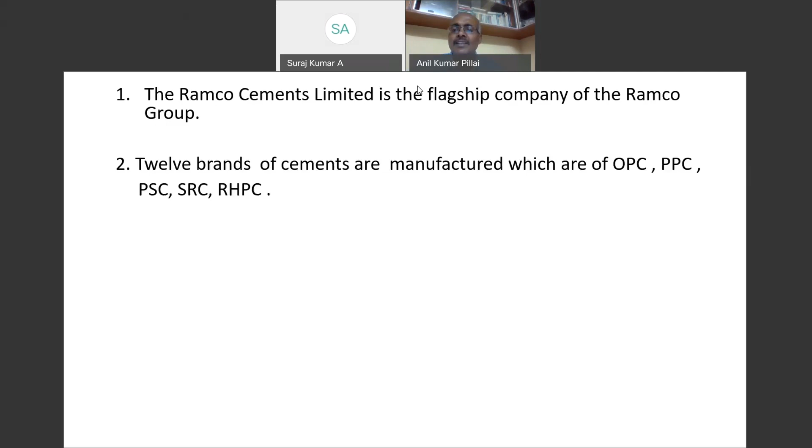What we do is our team of civil engineers goes to the site to understand the requirements of concrete, because we need to understand what exactly the quality of concrete required at site is. That is where most of us go wrong, because at some places, mostly in small project sites, we do not define the properties of concrete. Once we define the properties of concrete, it's easier for us to see what should be the constituent materials and how the mix design should be, because it all starts with the basic definition.

As far as Ramco Cement is concerned, we are manufacturing from eight state-of-the-art production facilities that include integrated cement plants and grinding units. Presently, with a production capacity of 16.5 million tons, it is expected to reach 20 million tons per annum, because we have our new grinding unit at Odisha, our grinding units at Kolagat and Vizag have also been expanded, and we have a new integrated plant coming at Kurnool in Andhra Pradesh. So that is expected to take it to 20 million tons per annum.

We are also into the field of ready mix concrete and dry mortar products, and we operate one of the largest wind farms in the country. Because ready mix concrete, as all of us know, we have a unit at Chennai, and we are able to see how concrete is being produced using our cement.

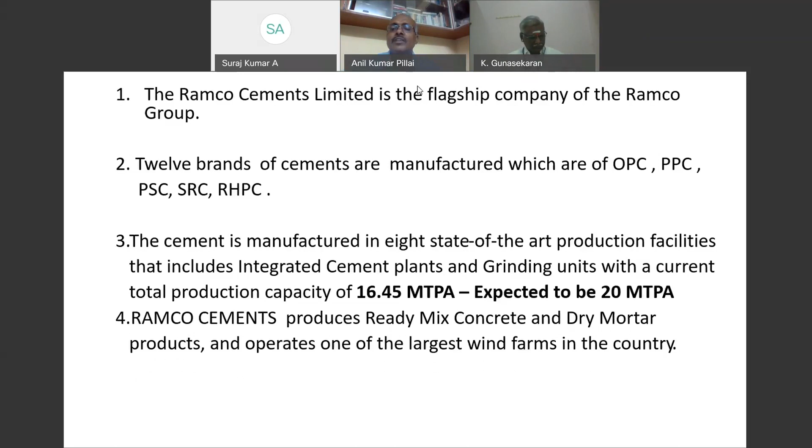Dry mortar products are used basically for non-structural applications, and the dry mortar plant at Chennai is established in collaboration with M-Tec Germany. That is where we are able to manufacture various kinds of products, like tile adhesive, super fine putty, and various kinds of tile grouts. So all these plastering compounds, related to non-structural applications, come from our dry mortar plant.

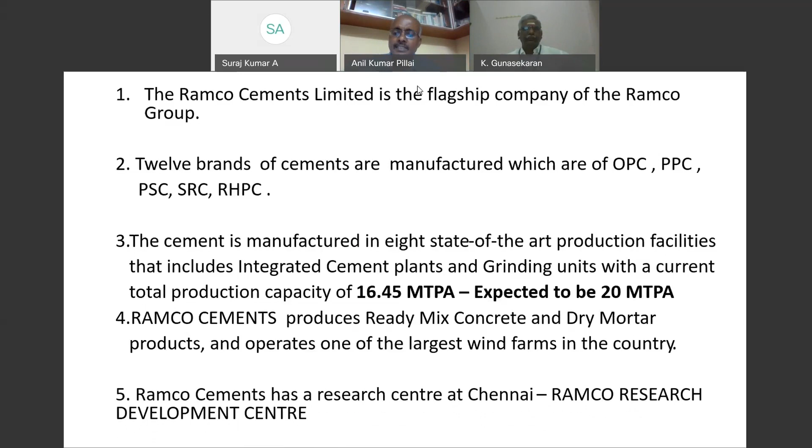We also have a research center at Chennai, the Ramco Research Development Center. This is a place where we do a lot of work on concrete as well as cement, because it is not only cement that is important, but what is the behavior of concrete when we use those particular types of cement, that is very important.

What we do is we get the requirements of concrete from various customers. We have done a lot of concrete mix designs, so by virtue of that, we have a database of concrete mix designs at our Ramco Research Development Center.

As all of us know, there are a number of variables, because the type of aggregates, the type of sand, the type of chemical admixtures available throughout the place, wherever we see, would be different. The chemical admixtures would be manufactured by different companies. So we have a concrete mix which is a judicious combination of all these ingredients, so that the objectives of the concrete are fulfilled.

That is where one of the basic challenges we see is cement chemical admixture compatibility, and that is where we have been able to help our customers, because cement admixture compatibility is sometimes very puzzling, sometimes very tricky, and the easiest way is to do a trial set of concrete mix using those proportions, and that is where we have been able to help.

Okay, at my place, he's joined, huh? Yeah, sir, are you there? Sir, I am joined, yes sir, I am here. I am joined already. Okay, fine.

Before I start, I will take a few minutes to give a brief outline of my presentation. First of all, the topic of concrete properties has no boundary limit to restrict it, so we can go on talking and discussing in different domains and angles on concrete properties, starting from what is concrete, properties of concrete in fresh and hardened condition. When we say hardened concrete condition, concrete properties under different domains like mechanical properties, durability properties, bond properties, structural properties, both structural and non-structural element properties also.

All this can be discussed in different ways for different levels of people like students, faculty members, research scholars, and practicing people. But today the forum is different because all levels of people are here as the audience. Therefore, with the time availability, I will try my best to discuss some important concrete properties in such a way to attract the different levels of the audience.

So this is my usual way of starting. Normally my session is always interactive, but since today's forum is different, the question also will be asked by me, and the answer also will be given from my side itself. So normally, whenever I am talking about concrete, this is the first question I use to ask the audience: which is the most widely used substance on the earth?

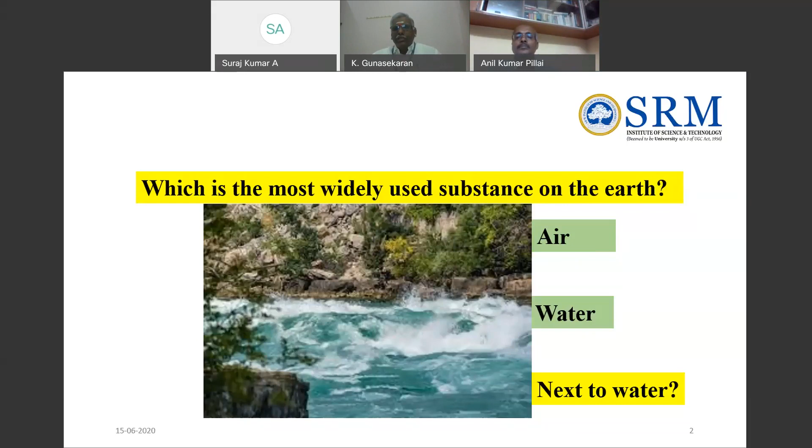Then what is the next one? Next to water, there is no doubt, it is nothing but concrete, the construction material. Concrete is the very compatible material from a construction point of view.

Many reasons are there. One is that the main ingredients to produce concrete are readily and cheaply available: cement, sand, aggregate, water. These are the main normal ingredients. Except cement, all others are natural resource materials available everywhere. Nowadays cement is also available all over the world, even in remote villages. So the ingredients are very cheap and readily available everywhere, so no need to worry about where to get them.

The second reason is that it is possible to make any kind of pattern or shape. It is not necessary to only go for a symmetrical or regular section. Whatever shape you want to create, you just need the mold for that pattern. If you prepare the mold, prepare the concrete, fill it, and after it sets, remove it, you'll get the pattern. That is another factor.

The next one is energy. How much energy do you have to put in to produce concrete? Very, very little. If you decide now, within half an hour you can collect all the ingredients, take some proportion, mix the concrete, mix the ingredients, and get the concrete. That is possible, whether you are producing bad concrete or good concrete is a different matter, but concrete is concrete. No other material can be produced on your own without much energy.

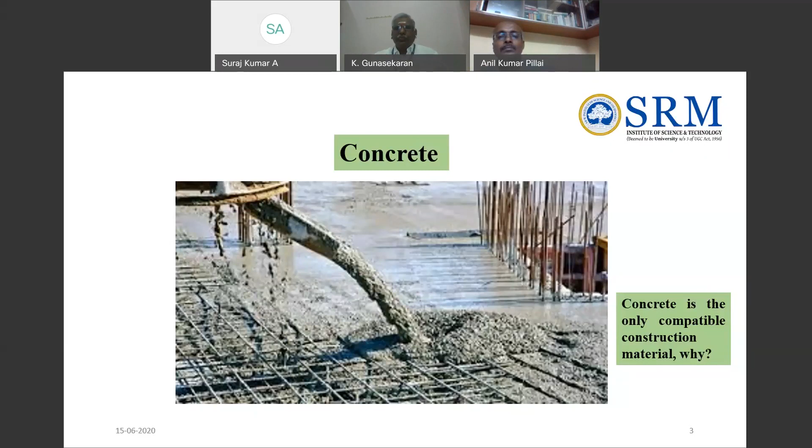So what is concrete? To understand this, I like to use the example of the South Indian favorite breakfast, idli and dosa. This idli and dosa need certain ingredients, and that too in some proportion. If you do not follow the proportion, if you do not follow the quality of ingredients, then your idli and dosa will not turn out as idli and dosa, it will become something else.

Likewise, concrete also has ingredients that should be of good quality. At the same time, it should have good proportions for the requirement of the specific purpose of the work, because concrete produced for one particular purpose cannot be used for some other purpose or some other site. Different purposes, different projects, different locations need different proportions and different quality of materials. So whatever material you use should be of quality as per the standard, and there should be proper proportioning, otherwise it will go wrong.

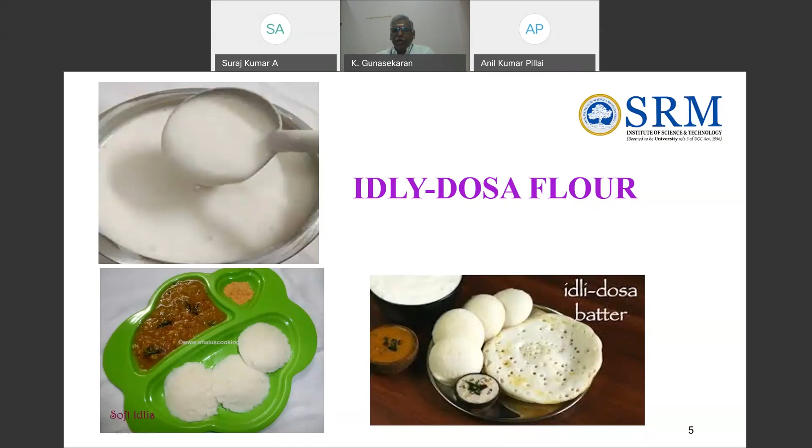So comparing to idli and dosa, concrete is very similar to that. For example, the ingredients used for idli and dosa are rice, urad dal, fenugreek seed, salt and water. All these materials are there as ingredients for the preparation of idli and dosa, but the quality of these materials as well as the proportion of these materials will also affect it. Both will influence the outcome of idli and dosa.

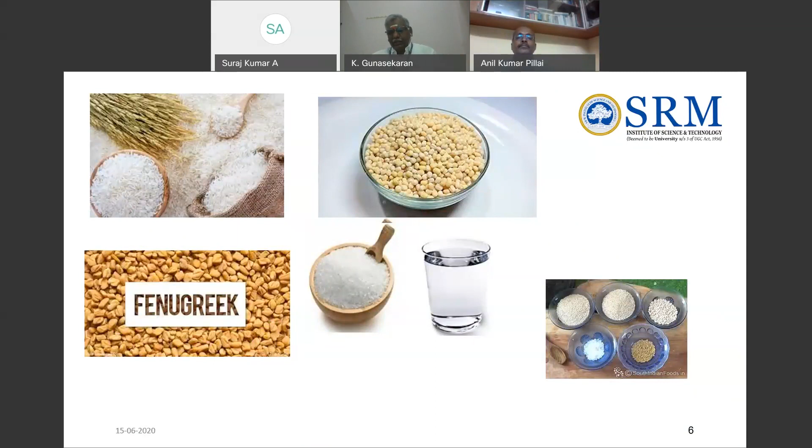The same way, here also cement, sand, aggregate and water are the ingredients having quality of this material also, but there should be some proportion for the preparation of concrete. So if these two are matching together, then only we'll get the quality of concrete.

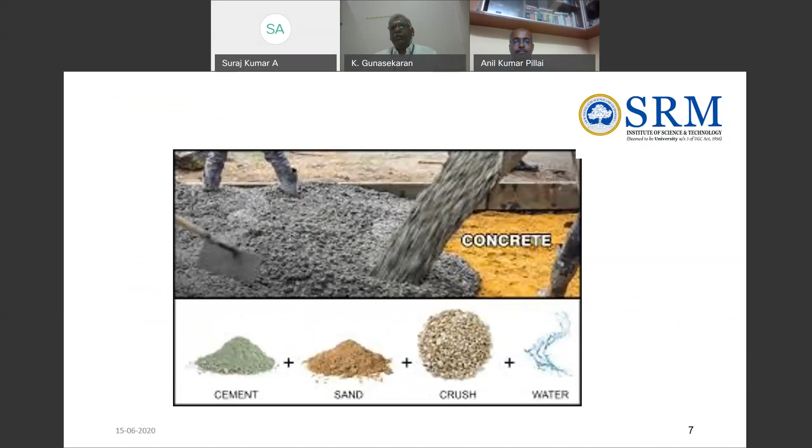So when you say properties of concrete, the topic itself is the properties of concrete, the methodology they use for different properties, and the significance for comparison purpose. When we see the properties of concrete, it can be discussed in two different ways: one is at the fresh state condition, the other is the hardened state condition.

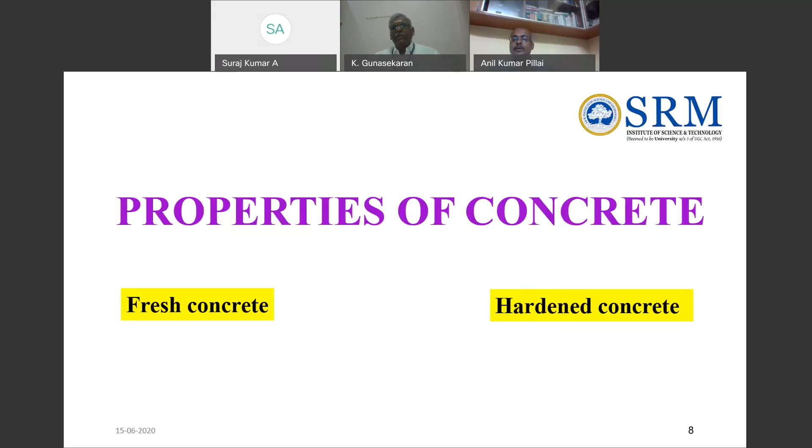In case of fresh state of concrete, the main property is workability, and then segregation, bleeding, and density. These are the main properties of the fresh concrete state.

We can talk about each and every property in more than one or two hours. Within the time limit of one hour, it's not possible to cover all the properties. So we may cover just the important parameters, the important methodology, and the important significant comparison.

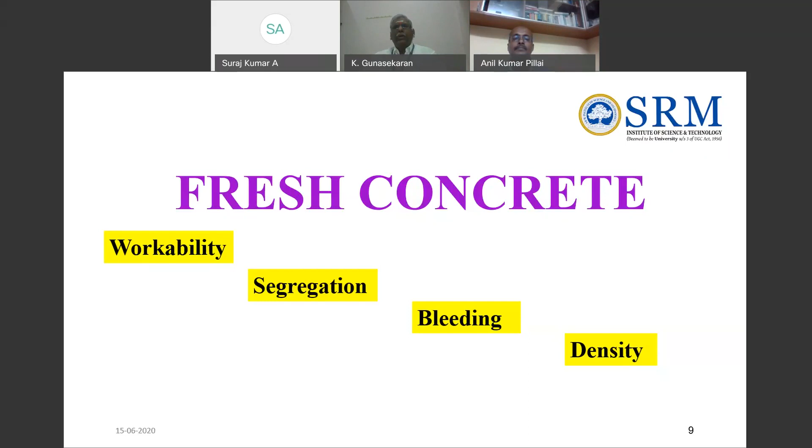For example, take workability. This is a very important property, but it is very complex. It is not static, it is dynamic. Concrete property which determines the amount of useful internal work necessary to produce full compaction is called workability. Otherwise, the property of fresh concrete which determines the ease with which it can be placed without any segregation.

To define workability, different standards give different definitions. For example, the American Concrete Institute, ACI, defines workability as the property of fresh concrete determining the ease and homogeneity with which it can be mixed, placed, consolidated, and finished.

Similarly, another organization, the American Society for Testing and Materials, ASTM, defines it as the property determining how much effort is required to work with the fresh concrete with a minimum loss of homogeneity. Likewise, many definitions exist for the workability of concrete.

But from these different definitions, it is very clear that there is no straightforward definition for workability of concrete. Therefore, in very simple words, we can say that the workability of concrete means the ability to work with the concrete, that's all.

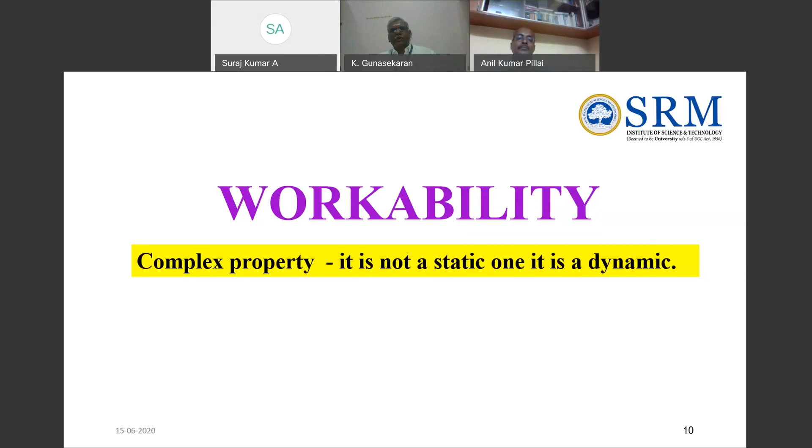So there are different methods for measuring the workability of fresh concrete. Each of them measures a particular aspect of concrete, and there is no unique test which measures the workability of concrete. Then, what are the different tests that are there?

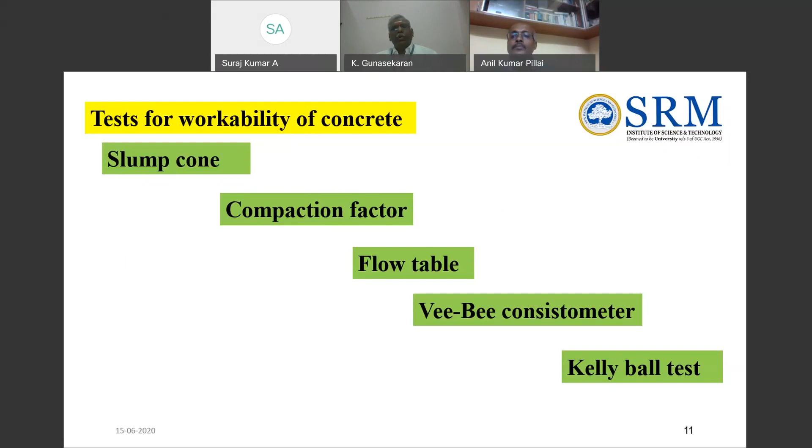So I will just touch on one test, which is the most commonly used method for measuring the consistency of concrete, which can be employed both in the laboratory and at the site also. That is nothing but the slump test. So everybody knows what the slump test is.

Most people, even at the site engineer level and below, are doing this test. But how are they doing it, whether they are systematically following it? Maybe the slump cone size is the same, the preparation of concrete remains the same, no problem. But while doing the slump test, whether you are following it as per the standard is the question.

Normally, people go for doing the slump test by dividing it into 3 layers in the slump cone. Even in textbooks, even in literature, even in journal papers, people mention it like this only, whenever they are making some new material to produce concrete.

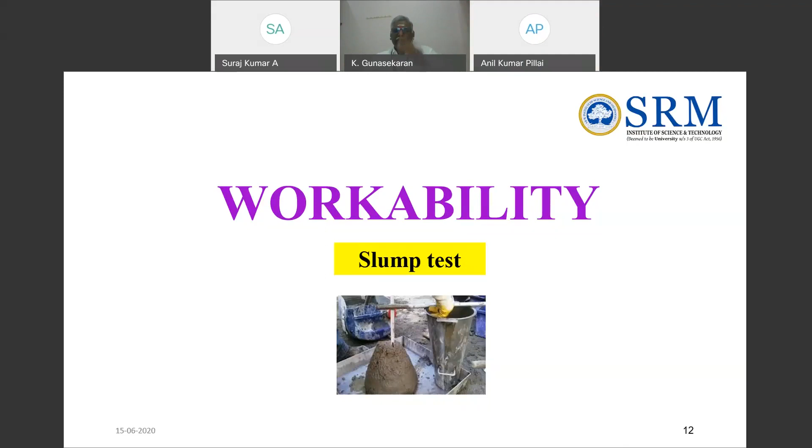But if you see the standard, we have the code book for that: IS 1199 of 1959. There is a revision going on for that, the 2018 version is under drafting. There's also a code book called ASTM, American Society of Testing Materials, C143. And one more organization, the American Association of State Highway Transportation Officials, T119. So these 3 codes are there.

Of course many codes are there: BS is there, the Australian Standard is there, New Zealand is there, China is there. But normally, as Indians, we follow the Indian standard, and we also compare it with ASTM or ACI or American standards.

So if you look at this Indian standard 1199 of 1959, it very clearly states that the entire depth of the slump cone should be divided into 4 layers, not 3 layers. Now, if you want, you can see the classification, that is Clause 5.1.4 of IS 1199. It says that the entire height of the slump cone should be divided into 4 layers, not 3 layers.

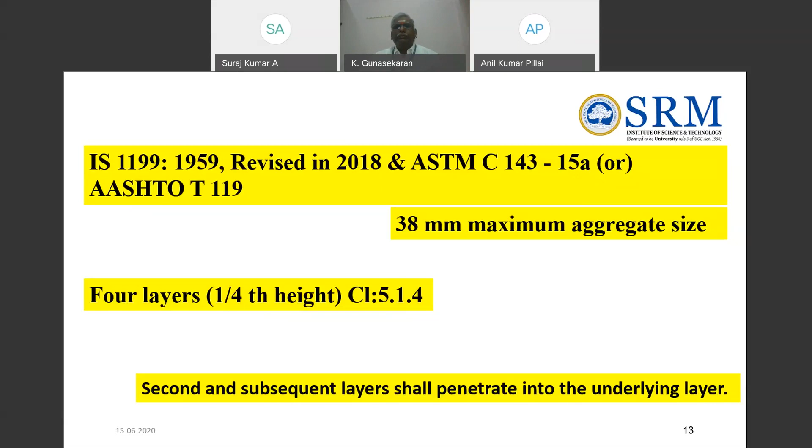So whatever the type of concrete, for whatever type of project you are producing the concrete, it should be like this. But sometimes what may happen, there are three possibilities. One is called true slump, that's what we need from our concrete. The second one is called a shear slump, and the third one is called a collapse slump. So these three types of slump may occur while doing the slump cone test. What type of slump we are getting, that should be very carefully observed. We need from the concrete only true slump, not a shear slump or collapse slump.

So what is true slump? Generally, the drop of the concrete must be even, as I said earlier, it should be evenly all around without any disintegration. So more or less, it has to maintain the mold shape, that is the slump cone size and shape. This type of slump is the most desirable one, as expected from our concrete.

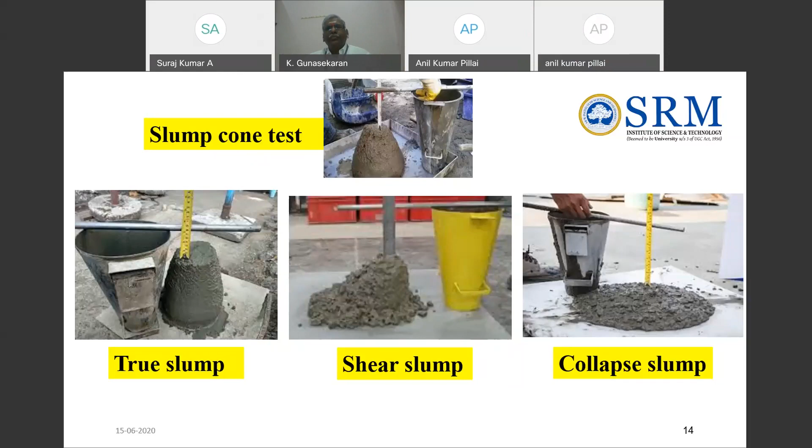And the next one is segregation. Segregation means separation or isolation of one thing from the other. In concrete, separation of coarse aggregate from the cement paste is called segregation generally. Segregation mainly occurs due to excess water in the concrete and non-cohesiveness of the concrete.

A good concrete is one in which all the ingredients are properly distributed to make a homogeneous mixture. If a sample of concrete exhibits a tendency for segregation of, say, coarse aggregate from the rest of the ingredients, then that sample is said to be showing the tendency for segregation. Such concrete is not only going to be weak, there will be a lack of homogeneity, and it will induce undesirable properties in the hardened state.

In concrete technology, segregation can be of two classifications in general. The first one is coarse aggregate alone may separate from the main mass of the concrete in a plastic condition. The second one is cement paste may separate from the mix. Both are almost the same - if aggregate is separating, it means cement mud is already separating in a separate manner. Cement paste getting separated means aggregate is already separated. That's the meaning, but why is it called two types of classification of segregation?

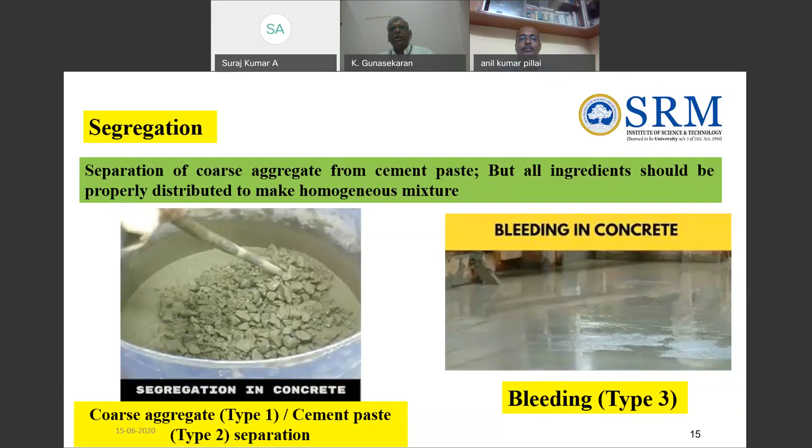Segregation is difficult to measure. There is no standard test for measuring segregation of concrete. So it is very difficult to measure quantitatively, but it can be easily observed at the time of concreting operation. The pattern of concrete slump test or the pattern of spread in the flow test gives a fair idea. You can get the idea by doing the slump test - from there you can get some idea whether segregation may happen or not. That kind of thing can be observed, but there is no straightforward test to conduct to get the idea about exact segregation in a quantitative manner.

If the concrete is used without proper treatment, what will happen? There may be honeycomb formation, there can be porous concrete, and it may happen that this cannot be considered good concrete, and it is not good from a durability point of view also.

Now if you take bleeding of concrete, as I said earlier, it is another form of segregation. When water comes out to the surface of the concrete, bleeding can be easily identified in the field by the appearance of a thin layer - you can get a thin layer of water over the surface. Once your concrete element is finished, you may find some thin layer of water on the top surface of a freshly mixed concrete.

So what happens due to bleeding? The water comes up and accumulates at the surface. Also, when the concrete surface is finished, after seeing the thin water film, people used to go for some troweling or floating over the surface. In that case, the coarse aggregate goes down and the cement and water come up to the top - they will not realize what is happening by the time. This formation of cement paste at the surface is called laitance.

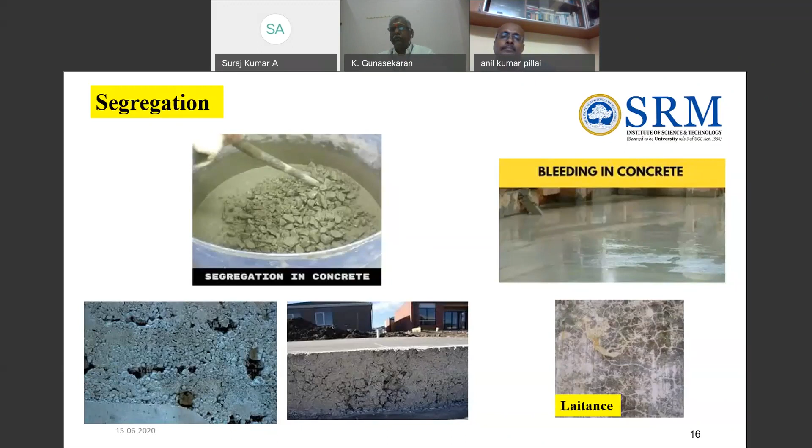So bleeding can be tested in a lab, and that is possible even in your field. How do you conduct this? It is very simple, but normally people will not do that. If it is needed, it only needs a cylindrical vessel, measuring jar, pipette, and tamping rod.

There is a standard for that, IS 9103 1999, revised in 2013. You have to fill the concrete in the cylindrical container to a total height of 250 mm, filled in approximately 50 mm layers, that means 5 layers. Each layer you have to compact with 60 number of strokes. Then you level the top surface and leave it for some time.

If excess water is there, it may come out to the top surface. For the first 40 minutes duration, every 10 minutes you have to measure and suck the water using the pipette. After that, at 30 minute intervals, until the entire water comes out at the top surface, you collect it and transfer the collected water into the measuring jar.

Then there is a formula to calculate how much percentage of bleeding water is in your concrete: capital V divided by small w, into S divided by capital W, into 100. Capital V is how much volume of water you extracted from your concrete, collected through the pipette into the graduated cylinder, called bleeding water mass. Small w is the mass of water in that particular batch, how much batch of concrete you are testing and how much mass of water is there.

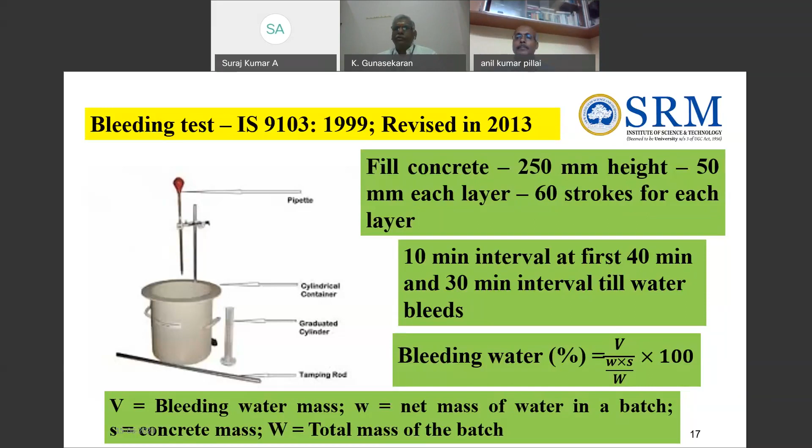Now we talked about workability, segregation and bleeding in the fresh state of concrete condition, and we discussed shear slump and collapse slump. To avoid this, there is a very simple concept for how your concrete should be when you prepare it in a fresh, plastic condition.

Now I have shown here curd rice. People, especially South Indians, like to have curd rice like a breakfast of idli and dosa. But in curd rice too, people expect it should not be very stiff and should not have too much water added, it should be consistent. The curd and rice should be blended together, not separate.

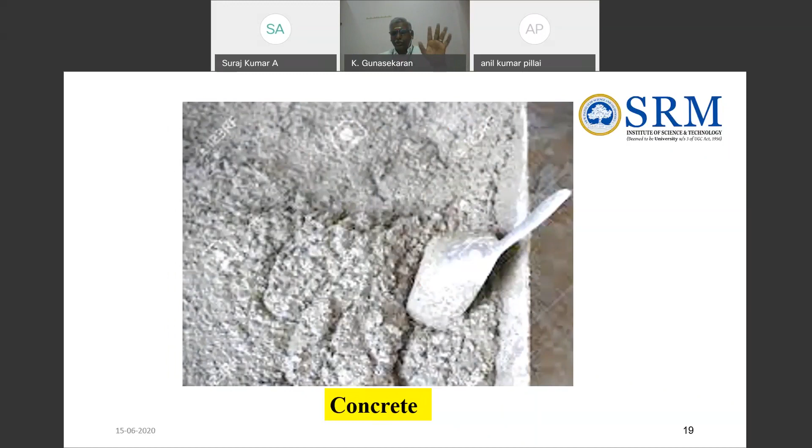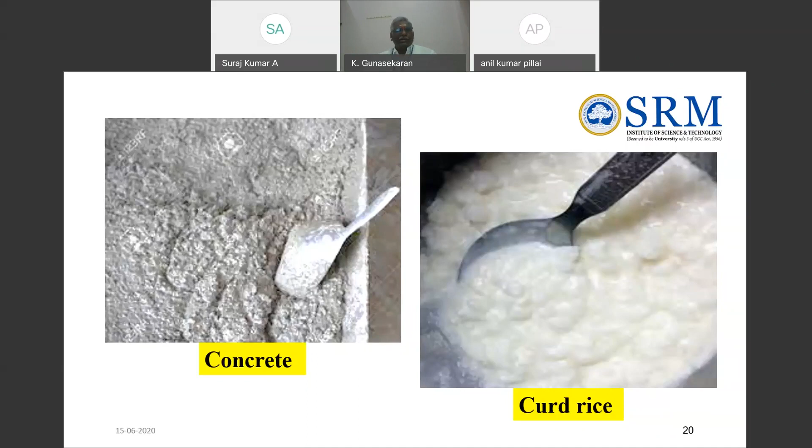As I said earlier, many properties are there, so I've only touched on a few properties of fresh concrete. Now let's come to hardened concrete properties. Many domains exist to discuss in depth. For example, mechanical properties include compressive strength, flexural strength, split tensile strength, modulus of elasticity, and impact resistance.

Then the next domain, durability properties: water absorption, sorptivity, volume of permeable pore voids, RCPT (rapid chloride penetration test), salt solution ponding test, sulfate resistance. Many tests are there for durability properties also. Similarly, bond properties, meaning the bonding between the concrete and the steel, where different grades of steel are used.

In each and every grade, there are different types of parameters. Similarly, when you go for structural elements like beam, slab, column, many elements are there. In each element, different parameters like flexure, shear, torsion have to be tested. Similarly, for non-structural properties like solid block, hollow block, paver block, mosaic tiles, pipes, non-pressure pipe, pressure pipe - many elements are there, and each needs its own specific parameters and testing requirements. All this is based on concrete properties, but if I discuss each and every parameter, there is no end. We could go on discussing.

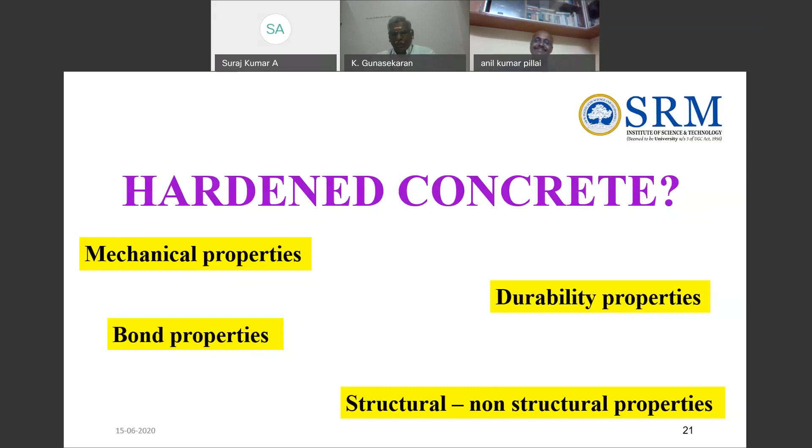So here I'll just take the first domain called mechanical properties. If time permits, I'll go for the durability properties and others. Otherwise, if one more opportunity comes, we'll see next time. So let me take the first one, mechanical properties.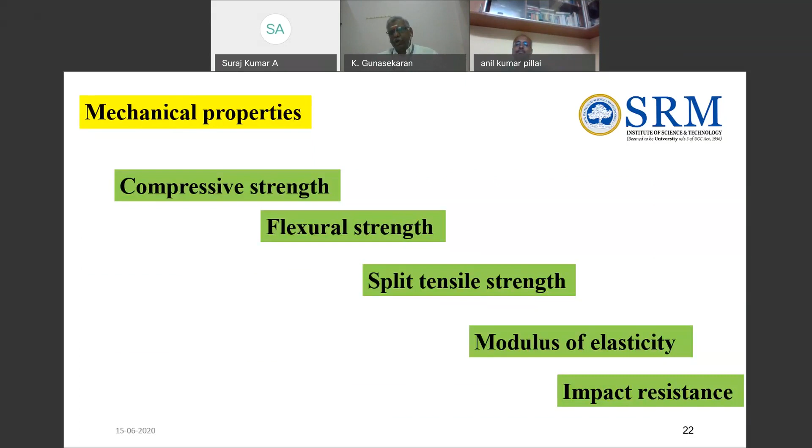As I said earlier, mechanical properties include compressive strength, flexural strength, split tensile strength, modulus of elasticity, and impact resistance. These are the 5 major mechanical properties for any concrete. Not only for normal concreting, but whenever you are using new materials, you must test for these properties. Now we'll take them one by one.

First one, compressive strength. The compressive strength of concrete is one of the most important and useful properties of concrete. In most structural applications, concrete is employed primarily to resist compressive stresses. In cases where strength in tension or shear is of primary importance, compressive strength is frequently used as a measure of the tensile and shear strength of concrete. Compressive strength is also used as a qualitative measure for other properties of hardened concrete.

There is no exact quantitative relationship between compressive strength and other parameters in general. There are many factors which affect the compressive strength of concrete. Mainly there are 5 factors which influence the strength when testing for compressive strength: shape and size of the test specimen, height to diameter ratio, rate of application of load, moisture content in the test specimen, and sometimes capping - the material used for capping will also affect the strength.

If I take each one completely, it will consume some time, so I'll discuss the important parameters here. We have the code book called IS 516-1959, again there is a revision to that, and similarly ASTM C 39-20 and BS 8110-1997. All these codes give the procedure for compressive strength testing.

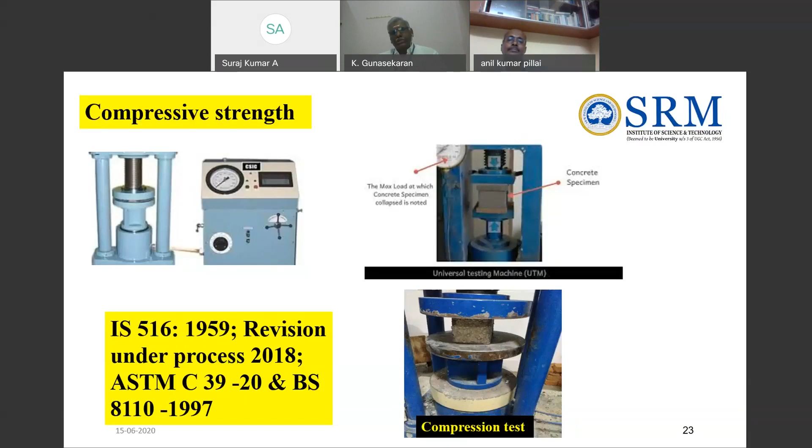Normally it has to be done at room temperature - we know room temperature is 27 degrees plus or minus 2 degrees centigrade. Then, how to prepare the test specimen?

IS 516 specifies that if you are going for 20mm aggregate, you can go for the 150 combination - that is, cube size of 150 by 150 by 150, or 100 by 100 by 100, or 150 diameter and 300mm height cylinder, or 100mm diameter and 200mm height cylinder. Normally for compressive strength, in Indian conditions we follow only cube sizes, while in America they use only cylinders. When using 20mm aggregate you can go for the 150 combination, or if using less than 20mm aggregate, you can go for the 100mm combination.

Again, there is an issue in compaction. Suppose you are using normal compaction at your site - every time we just go for 25 strokes, but that is not correct. If you are using 100mm cube, only then do you go for 25 strokes. When using a 150mm cube, for every layer you have to go for 35 strokes. That is the standard - 25 strokes is not constant. It depends on the size of the cube you are using, in the lab as well as at the site. 150mm means you go for 35 strokes, and 100mm means you can go for 25 strokes.

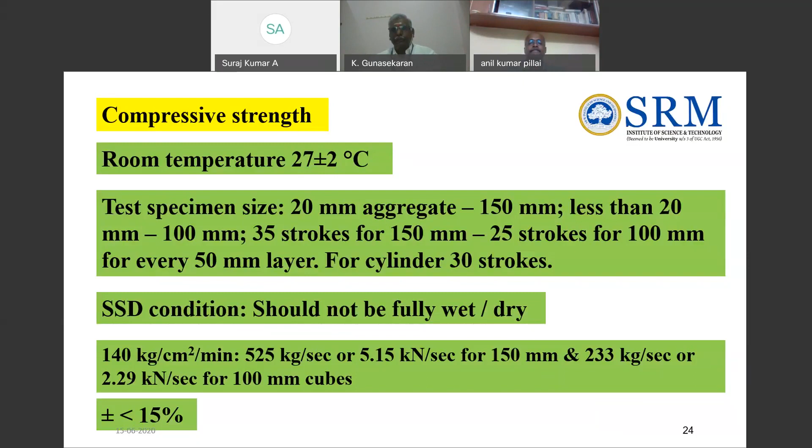So next one, flexural strength. I'll give some brief idea about flexural strength. Concrete is relatively strong in compression and weak in tension. Everybody knows this proverb of concrete: concrete is strong in compression, weak in tension. So in case of reinforced concrete construction, the strength of the concrete in compression is only taken into consideration. The tensile strength of concrete is generally not taken into consideration.

The flexural strength of concrete was found to be generally 8 to 11% of the compressive strength of concrete if the strength of the concrete is greater than M25. If it is less than M25, then the tensile strength may be 9 to 13% approximately.

Direct measurement of tensile strength of concrete is very difficult. Neither specimen nor testing apparatus have been designed which assure uniform distribution of the full applied load of the concrete. Therefore, beam tests are found to be dependable to measure the flexural strength property of concrete. So there are two methods: one is called the central point load, the other one is called the 2-point load.

One is called the central point load, the other one is called the 2-point load. Compared to central point load testing, the variability of result is less in case of third point loading. There is an organization called Central Road Research Institute. They conducted many research studies on this central point load and third point load test, and they reported that in all cases, the central loading gives higher average value than the third point loading, irrespective of the size of the sample.

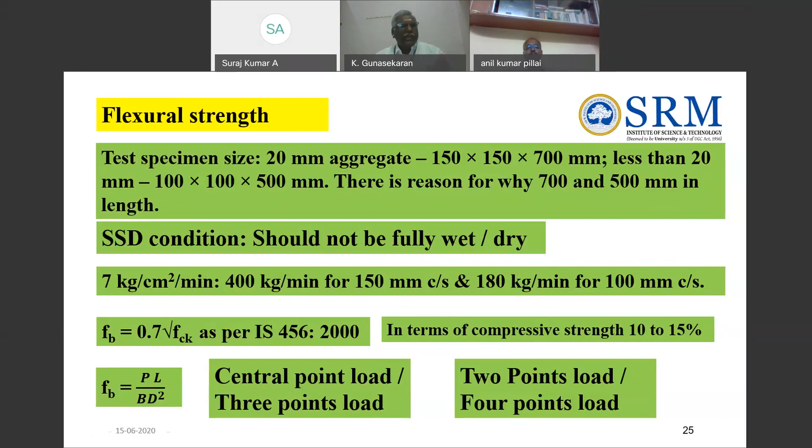Why is it called 3-point load and 4-point load? On the left-hand side, the specimen gets contact at 3 points: one is the applied load, the other two are reactive loads. So there are 3 points of contact on your specimen. That is why it is called 3-point flexure test.

In case of 2-point load, generally application of point load is at 2 points, but the applied points are 2 and reactive points are 2. So 2 plus 2, again it is 4 numbers. 4 points of contact are there in case of your 2-point load. That is why the other name given is 4-point load flexure test.

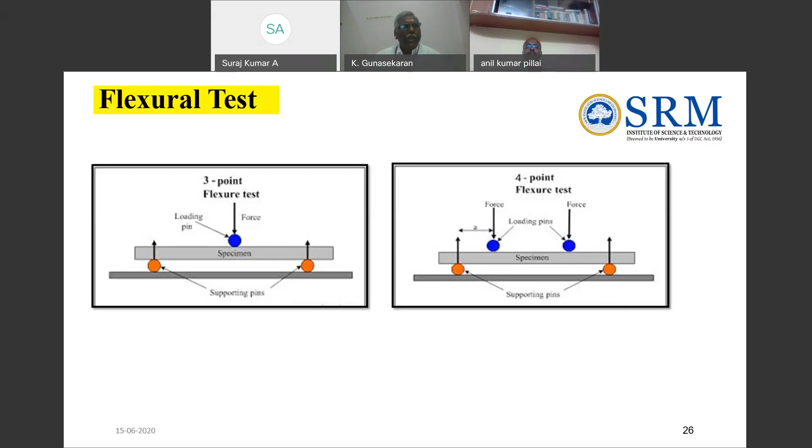So central point load, the other name is 3-point load. 2-point load is also called 4-point load. The reason is the point of contact between the application of load and the reactive point on your specimen.

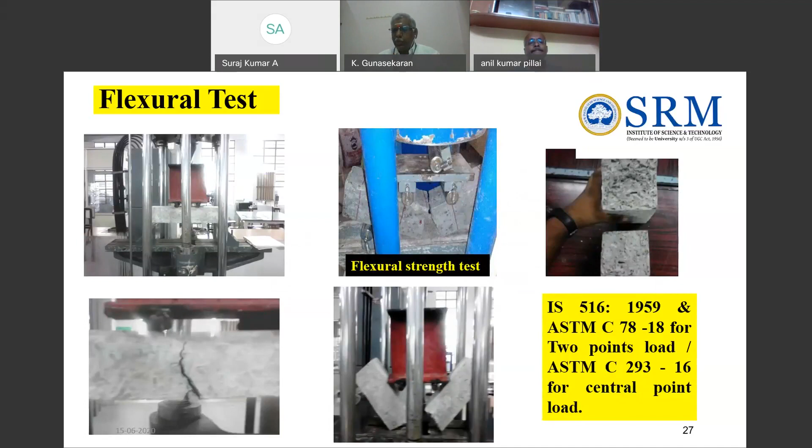Now again for this test also we have the same IS 516-1959 and ASTM C 78-18 for 2-point load separately, and ASTM C 293-16 for central point load. Now the question is, we have two methods. Which method is the best method? That is the question now.

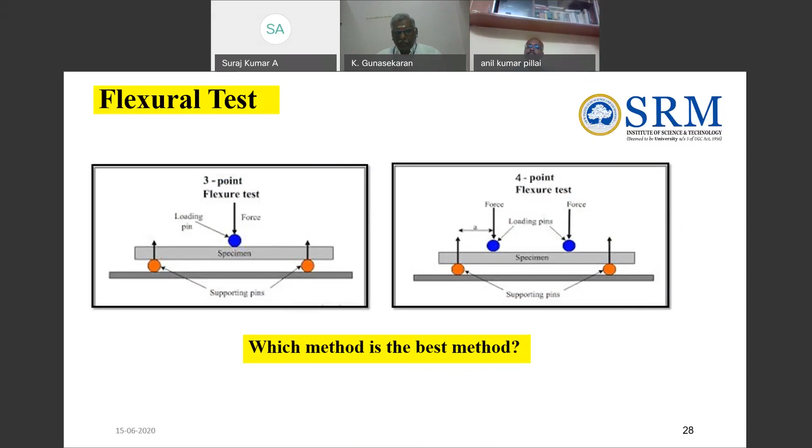Generally, to compare and get an idea, normally people are doing 2-point load in most cases. Even nowadays the sophisticated UTM and CTM have the setup for testing flexural strength in the same CTM itself. So you can replace that particular part and insert it, and you can test the flexural strength in the CTM itself. That kind of arrangement is there nowadays, but earlier it was not there. Only UTM was available for testing the flexural strength.

So mostly they are using 2-point load, but whether people know or may not know which method will give the accurate value of flexural strength, let's take an example of those two cases: one is central point or 3-point load, and the other is 2-point or 4-point load. Both cases are standard cases in simply supported conditions.

Central point load simply supported is the very first basic, general condition. So we know very well what the shear force and bending moment are for standard cases like this. For this first case, point load, maximum bending moment is WL by 4 and shear force is W by 2; here P is the notation given, so it's P by 2 and PL by 4.

Similarly, on the right-hand side, 2-point load, since it is symmetrical, the reaction is also symmetrical, and the shear force diagram and bending moment diagram are shown there.

Now our aim is to find the flexural strength of the concrete. That means the concrete should be completely subjected to only flexure, not associated with any other nature of forces or stresses.

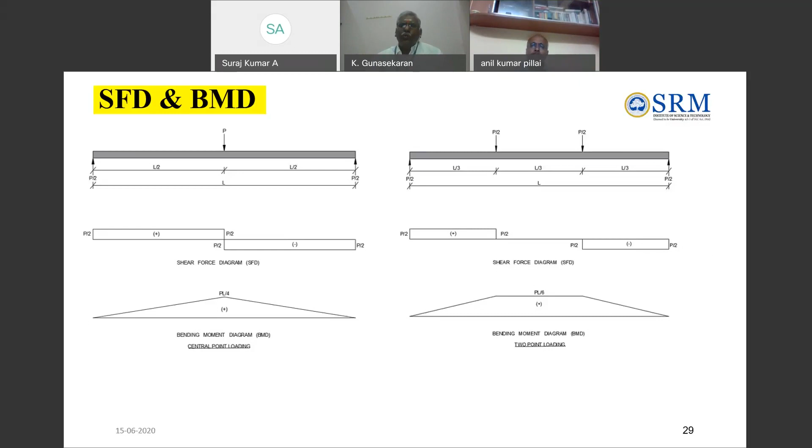That is the reason why this method is accurate and gives a precise value for the flexural strength of the concrete. If you do the central point load, the effect of shear will also be there in your flexural strength reading; it is not completely with respect to only flexure, it is also associated with some amount of shear. So since we want the actual flexural strength of concrete, instead of going for central point load, you must go for 2-point load to get the actual strength of flexure of your concrete. That is the reason why you want to go for only 2-point load.

Again, the formula is very simple, PL by BD square. Now see that the flexural strength formula for central point load is PL by BD square 3/2, while here it is PL by BD square. As I said earlier, central point load will give somewhat higher value compared to the 2-point load, because that is also associated with, in addition to bending, some shear force. That is the reason.

How we are getting this PL by BD square is also a very simple concept from the bending equation value. We know bending equation M by I equal to F by Y equal to E by R. From that, if you know the maximum bending moment, take the combination of M by I equal to F by Y, where F is bending stress, M is maximum moment, I is moment of inertia for the section, and Y is the maximum distance from the neutral axis. From this concept only, the formula is derived.

From the student's point of view, if you do not remember this formula, but you know the concept of the bending equation, then you can easily substitute and get the formula, and then do the further process. So there is no necessity of mugging up your formula. Once you understand the concept, you can easily get the formula. Like this, for many cases. So from the student's point of view, don't mug up the formula, get the concept of the particular chapter or topic. Once you understand the concept, you will definitely never forget it.

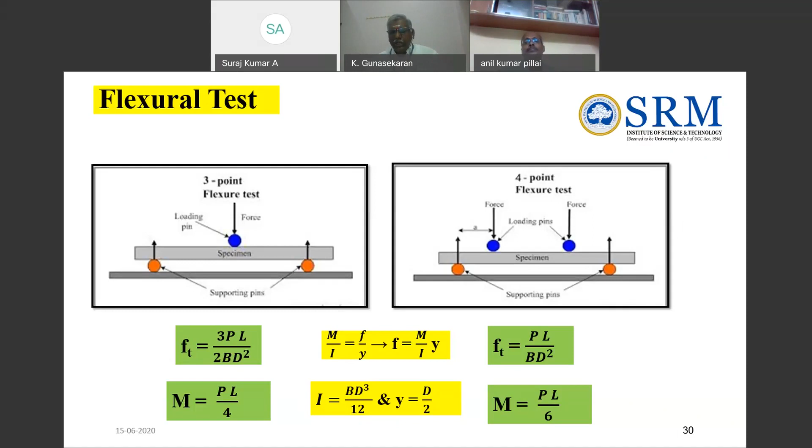That is my advice. For example, for some standard cases, even if you wake up in the midnight from your bed, immediately you should be able to tell on your fingertips what is the maximum bending moment for a simply supported beam subject to UDL, which is WL square by 8. Those standard cases you should immediately be able to tell. For different cases, that is different, but only application of concept is needed there. Standard cases, as a student or as a practicing engineer, everyone should keep at their fingertips. For that, everyone should understand the concept behind the particular topic.

Now come to the second point, the indirect tensile test method. After compression and flexural strength, split tensile test is another method. This cylinder splitting test method is also called the Brazilian test, because this test was developed in Brazil in the year 1943. While doing this test, many people place packing strips both at the top and bottom of the specimen.

People use this simply thinking it's to keep the specimen in the right position, but that is not actually the case - there is a technical reason for that. The reason is, when you apply a load by keeping the cylinder in a diametrical manner, the loading condition produces a high compressive stress immediately below the two generators to which the load is applied, that is top and bottom. But the large portion corresponding to the depth is subjected to uniform tensile stress acting in the horizontal direction.

They estimated that the compressive stress acts for about 1/6 of the height or depth, and the remaining 5/6 of the depth is subjected to tension. So in order to reduce the magnitude of high compressive stresses near the point of application of the load, narrow packing strips of suitable material are used - normally plywood, having 25 mm width and 3 mm thickness. This should be placed between the specimen and the loading platen in the testing machine.

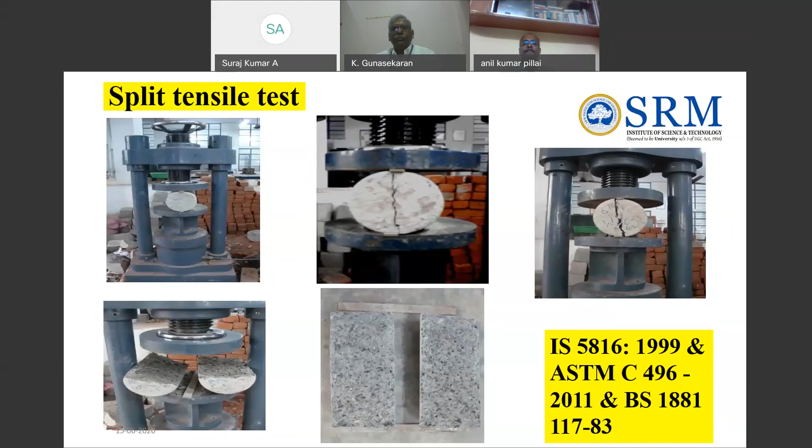Again here also like your size of the specimen, like a compression and flexural strength. If you are using 20 mm aggregate, you can go for a cylinder of size 150 mm diameter and 300 mm height. If you are using less than 20 mm aggregate, then you can go for 100 mm diameter and 200 mm height of the cylinder.

Again, everywhere I am mentioning the SSD condition, because that is very important to get the actual strength of your parameter. And here also we have the rate of loading 1.2 Newton per mm square per minute, so the range is 2.4 Newton per mm square as per the IS code.

5816-1999. But actually ASTM suggested the range of the load. It is not exactly for this type of size of cylinder, it should be like this, like that. But whatever the size of cylinder, your rate of loading should be 0.56 to 0.75 kN per second. That was the suggestion given in the ASTM standard.

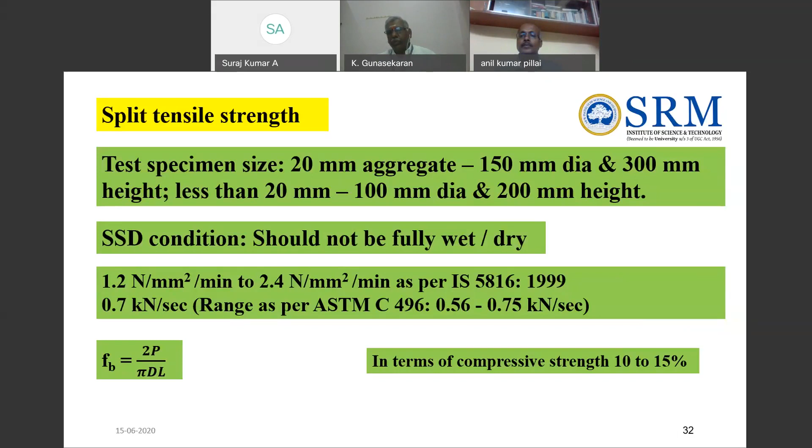The formula to calculate your split tensile strength is 2P by pi dl. Again, with respect to compressive strength, this strength may be 10 to 15% of your compressive strength.

Then last but one for this mechanical properties, modulus of elasticity. So again, some theory part - in case of theory of reinforced concrete, we assume that concrete is elastic, isotropic, homogeneous, and also conforms to Hooke's law. All these assumptions we make ourselves on concrete, but actually none of these assumptions are strictly true, and concrete is not a perfectly elastic material.

So the accuracy of design will naturally depend upon the value of the modulus of elasticity of concrete, because the modulus of elasticity of steel is more or less a definite value. Whatever may be the type or grade of steel, we used to take either 2 into 10^5 Newton per mm square or 2.1 into 10^5 Newton per mm square.

But in case of concrete, we cannot take it for granted. For all the grades of concrete, this is the amount of 5000 - even 5000 root FCK is applicable only for some conventional concrete, up to some standard mix like M30 or M40 maximum only. That too will give only a rough idea about the modulus of elasticity of concrete.

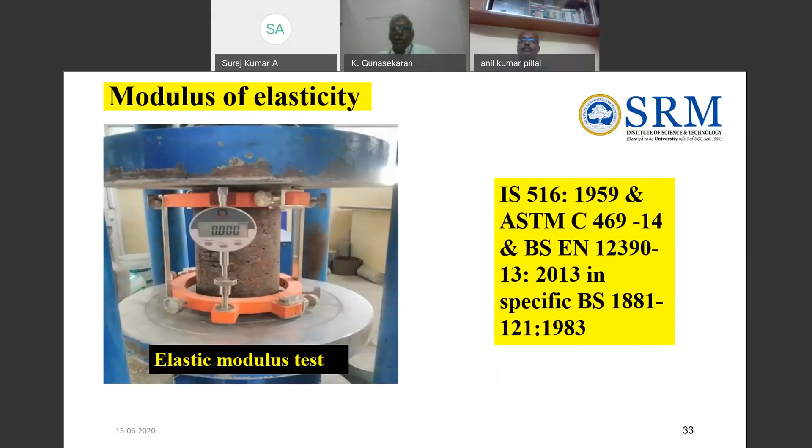Again, the same IS code 516 gives the procedure for modulus of elasticity in two different ways. Again, BS code is there, or ASTM code is also there. If you take our IS code, IS 516-1959, they recommended two types of testing. One is called extensometer method, by means of extensometer. The second one is called electrodynamic method, that is the dynamic modulus of elasticity.

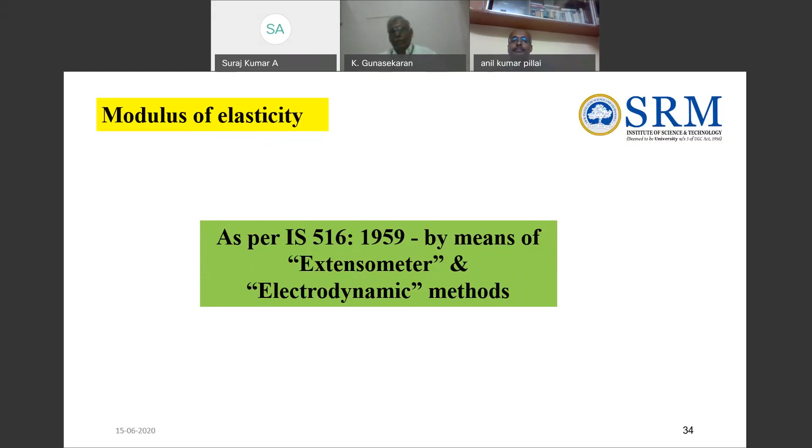So first, let us take the extensometer method. If you want to use that extensometer method as per our IS code, we need to get two extensometers, and it has to be fixed on either side of the cylinder, perfectly opposite to each other. And the gauge point, there may be a distance in your extensometer to fix the gauge points - that gauge point should be exactly matching opposite to each other.

That is very much important. That should be equally divided from the center point of view. So that is the arrangement you have to make in case of the extensometer.

And here also, like a compression test, the same rate of loading you have to apply, but the procedure is somewhat different. For example, you know what type of concrete you already casted, what is the compressive strength of the concrete - that average compressive strength should be taken as a C value.

Assuming that, as per the parameter and notation I'm telling about - so by knowing the average compressive strength of your concrete, let us assume it is a C value. Now C plus 5, you know what is the value of your concrete - C plus 5 kg per centimeter square.

So once you set the specimen in your compression testing machine using this extensometer, after fixing all the proper extensometers on either side as per the procedure, you apply the rate of loading the same way.

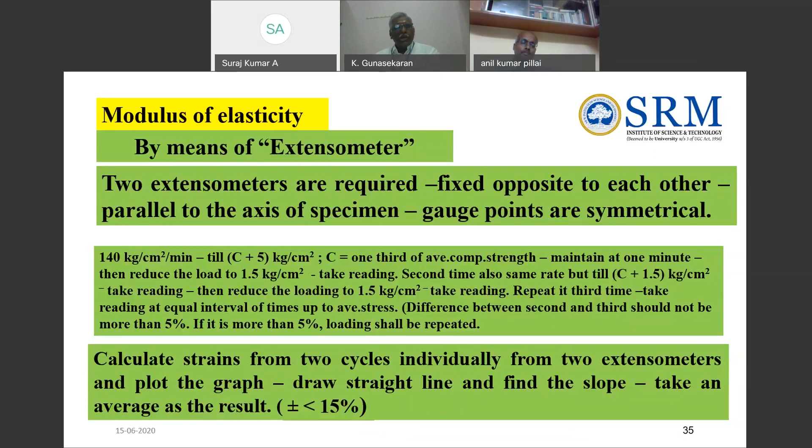The second method is called electrodynamic, which is nothing but dynamic modulus of elasticity. Normally people will not do this one because we are not using this kind of dynamic modulus of elasticity in the proper design of RCC elements. We only use static modulus of elasticity. However, here's how to do this one.

Again, there is an exciter needed, and there is a setup for fixing your element at the center. On one side there is an exciter where you have to develop a frequency mode of operation, and on the other side there is a pickup point. It is one kind of NDT, non-destructive testing. We are not destroying the element, we are just like ultrasonic pulse velocity and rebound hammer testing.

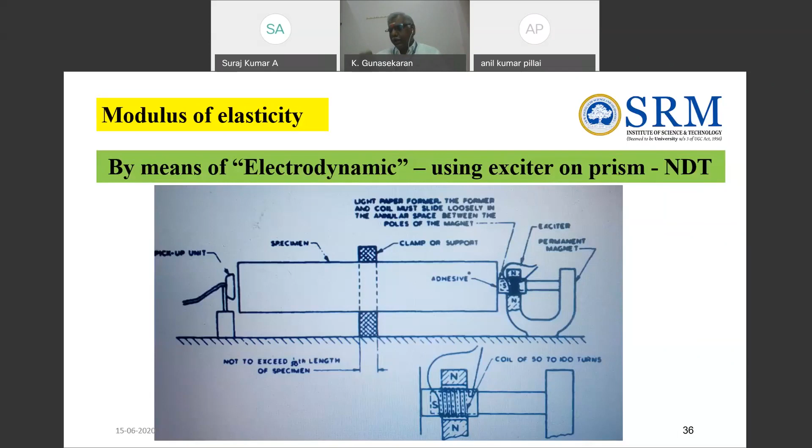The same concept here also. One side we will be generating the frequency mode that will be received at the other end pickup point. From that, making use of natural frequency and number of cycles, we have the formula to calculate the dynamic modulus of elasticity of the concrete.

The modulus of elasticity formula is given in the code itself, IS 5166: 4.083 into 10 power minus 9, n square, L square, W. What is n? Natural frequency in cycles per second, L is the length of the specimen, W is the density of your concrete.

Of course, IS 456 gives a formula for E value, 5000 root of FCK. It is only a short term static modulus of elasticity. It may differ plus or minus 20% with respect to the actual value, so it gives only a tentative idea when you are using 5000 root of FCK.

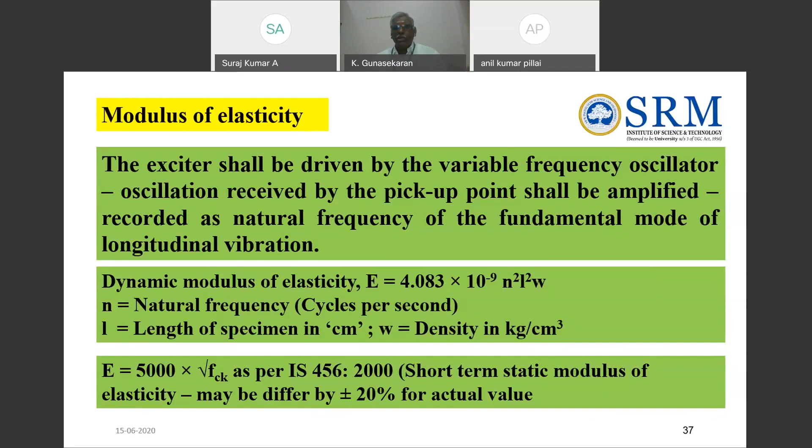Now, there are different types of modulus of elasticity, and I'll take a few minutes to go through that quickly. Let us assume you have conducted any one mode of test. Before that, this extensometer method is normally used by people, instead of extensometer or compressometer. Compressometer method is what people normally use in the lab as well as in the field.

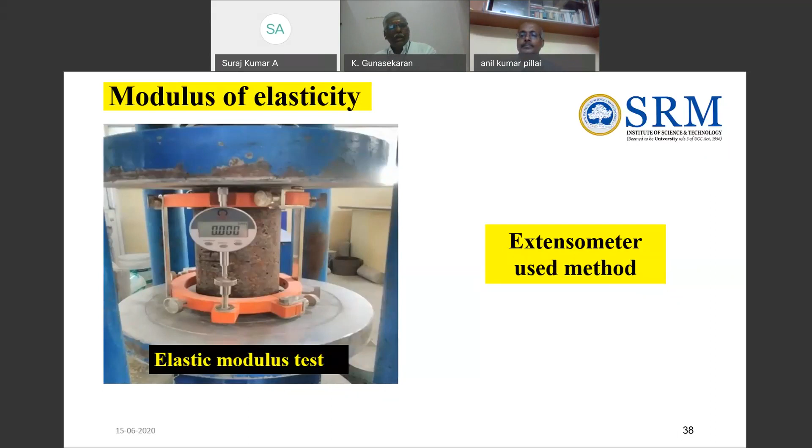This is very similar to the extensometer method, right? That is why I mentioned extensometer method. Here also the same procedure only: C plus 5, C plus 1.5, like that.

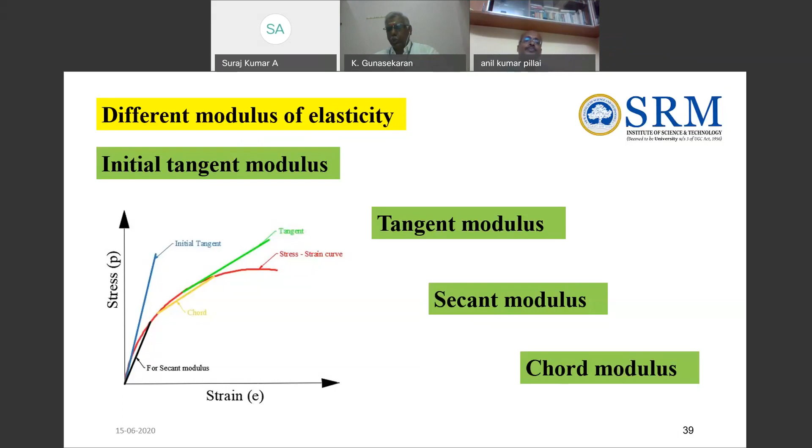So these are the different moduli, but generally for design purposes for concrete, the secant modulus is normally what people use, and that is nothing but 40% of your compressive strength of concrete, wherever it lies; from that point to the origin, what is the slope, that is called the secant modulus of elasticity.

Then I'll come to the last point of your mechanical properties, impact resistance.

Concrete is also subjected normally in some places to impact load. Suppose unexpectedly heavy loads fall on your concrete platform, then the concrete should resist the impact. For that, there is no Indian code, but ACI committee, American Concrete Institute 544.1R devised the method for testing the impact resistance of concrete. There is a mass of impact and height of hammer falling on the concrete element.

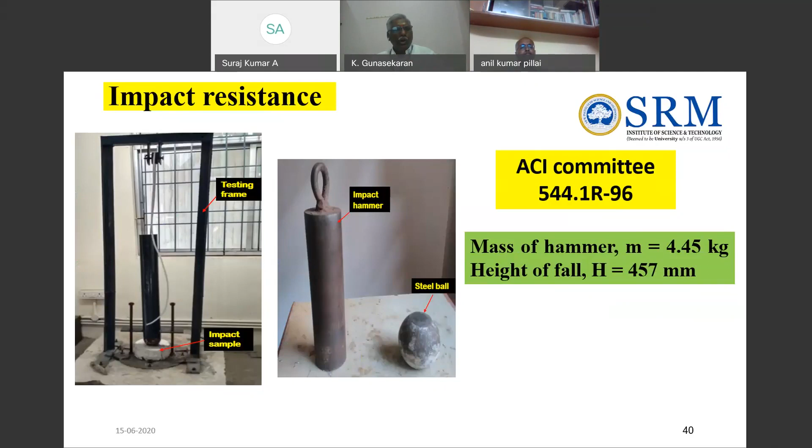The concrete size is 152.4 millimeter diameter, thickness 63.5 mm. If you want to test the impact resistance of the concrete, you have to prepare a disc of this size, 152.4 by 63.5 millimeter. A number of specimens are to be casted, minimum of 3 for each and every day of test - 3 days, 7 days or 28 days.

Normally people observe how many blows the concrete element takes for forming an initial crack. After that, they continue application of the hammer blow on the concrete element to see how many extra blows are needed to get final fracture. So formation of initial crack, how many blows, and formation of final fracture, how many blows - that has to be observed for a minimum of 3 specimens at a time to get an average.

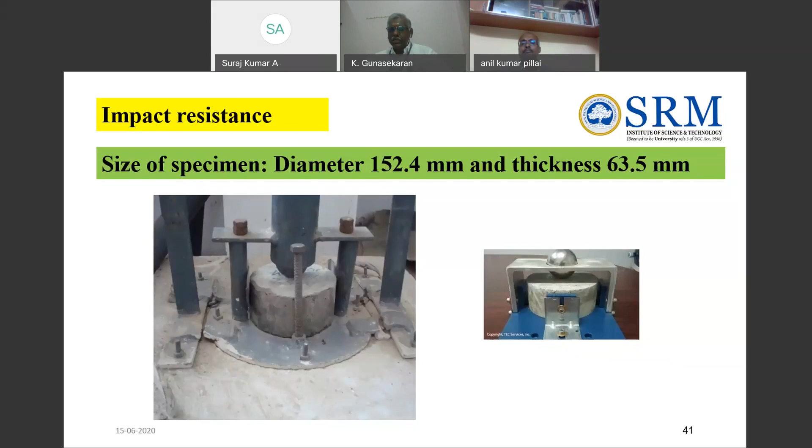If you refer to papers or literature, they will mention the number of blows for forming initial crack and the number of blows for forming final crack. Normally 10 to 25 blows will be taken by normal concrete up to M40 or M45. It can also be calculated in the form of energy, because impact is nothing but energy resistance, so in the form of Joules also you can calculate.

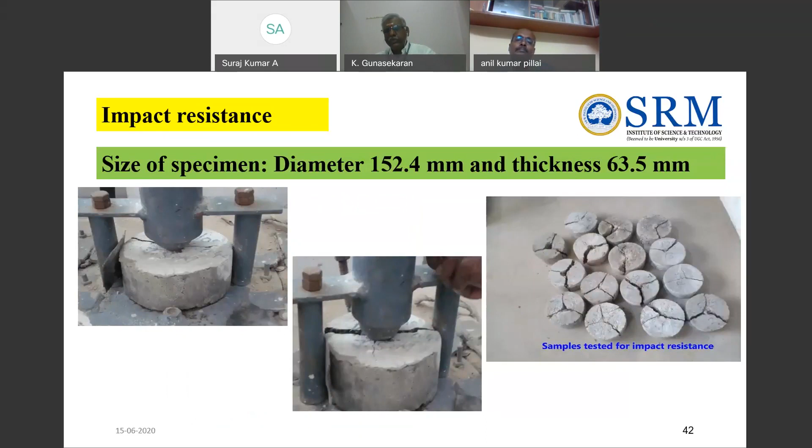This is a specimen tested. For example, the formation of initial crack and formation of final crack and the number of blows tested are recorded. So the impact energy, as said earlier, is 10 to 25 blows, mentioned here for normal concrete having a strength of 40 to 45 Newton per millimeter square.

Then impact energy can be calculated using this general physics formula: U is equal to mv squared by 2g, where m is the mass of the hammer as per the standard. There is a standard weight for that, which is 4.45 kg, and the velocity of the mass of the hammer with respect to height on the specimen can be calculated from the basic formula velocity is equal to g into t.

We know what is g, and we know the time taken for this. T can be calculated from the height, because height is nothing but gt squared by 2. Again this is from engineering mechanics, the projectile chapter: h is equal to gt squared by 2. We know the height we are going to allow - that is 0.457 meter as per the ACI code, and g is standard 9.81.

So from this, t can be calculated and substituted into the velocity formula, velocity is g into t for vertical distance. So we know the mass of the weight, we know the velocity now, and g also. From that, for one blow, the energy can be calculated - it is equal to 2.03 kg meter, which is the energy absorbed by the concrete. So the number of blows the concrete takes for initial crack, multiplied by 2.03, gives the energy absorbed by the concrete in terms of impact resistance.

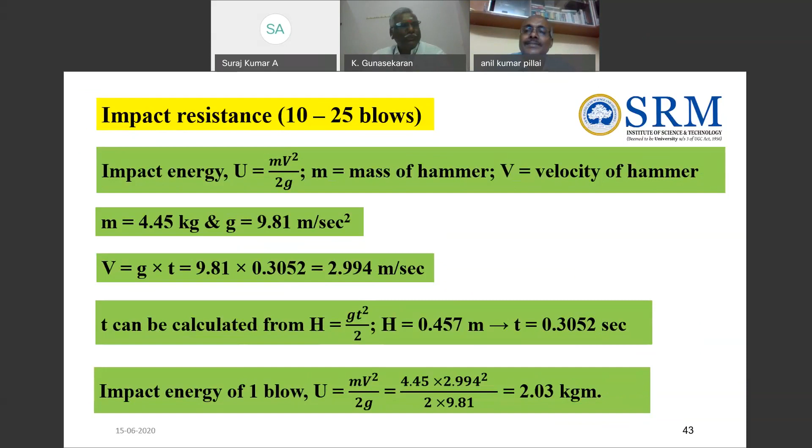It is very good actually, because the method of testing is normally something we do not pay much attention to, and because of that there is difference in results, since we do it mechanically. In fact there are two questions, sir, which have been put down.

Whether concrete which has true slump can be pumped for vertical height more than 50 meters. What question? Can you repeat the question, sir? Whether concrete which is having a true slump can be pumped for vertical height more than 50 meters.

See, that is also a practical problem, so we have to test it further. What is the pumpable rate you want to apply for up to 50 meters? What should be the requirement of your workability by that time? That should be conducted, and based on that, if you develop it, then it may go that way.

It is not the question of true slump alone, but the value of the slump is also important. It is not like that. That is why it is called not a static one, it's a dynamic one. So just by true slump we cannot determine the height. True slump will give you some idea about the segregation. So segregation and bleeding will not happen if it is a true slump.

So from a pumpable point of view, elevating to the required level, they have to run it, because pumpable concrete will also have that sometimes. Of course, we are using some superplasticizer for developing that kind of concrete cohesion. So segregation and bleeding can be identified from the true slump. That is the idea.